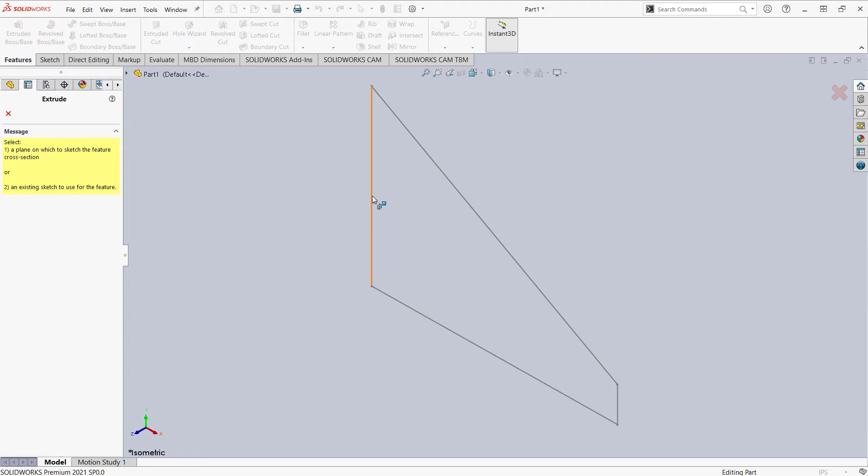Let's turn this sketch into 3D, heading to our Features tab and selecting Extruded Boss Base. So we are now prompted to select a plane or an existing sketch. I'm going to select this sketch, left click on this vertical line. Let me pull this arrow to the left, left click and hold.

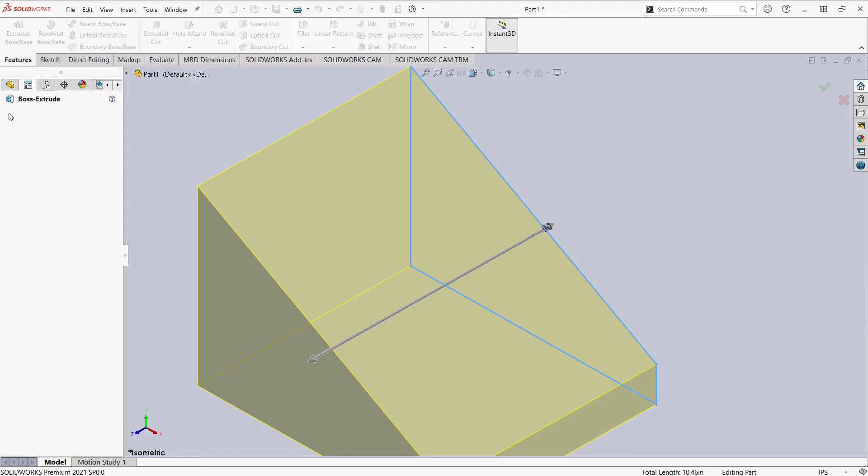Direction, blind, and our depth of extrusion to be 3. Selecting this green check mark. Let's create another sketch, this time on our top plane. Heading over to our Feature Manager, hovering over top plane, left click on this and select Sketch.

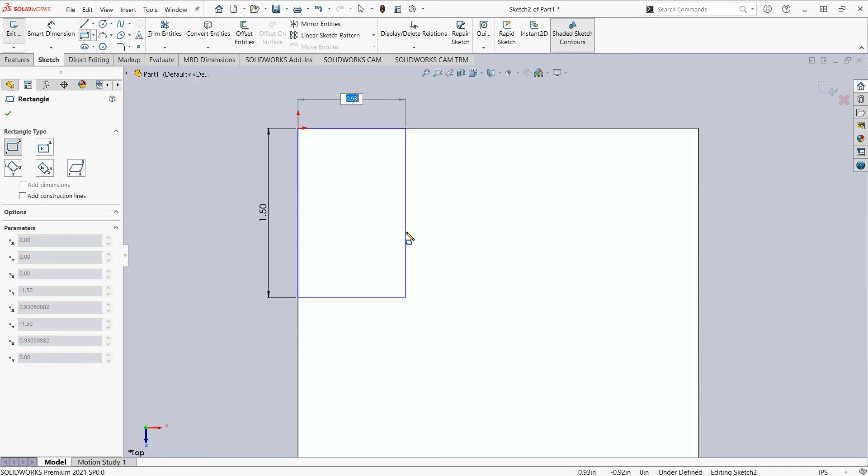Instead of grabbing our line command, I'm going to select our corner rectangle. Let's place its first point on this corner. Left click here. Notice the dimension field on the top is currently highlighted in blue. With that, I'm going to key in 1.5. Hitting enter. And let me pan down. And instead of keying in another value, I'm just simply going to left click and hit escape.

Let's grab our line command and this time create a triangle, heading up and selecting line. Let's place our first point at this intersection. So notice as I hover over this line, that yellow square on this line is the midpoint. Let's stray away from that. I'm going to simply left click on this intersection, move down.

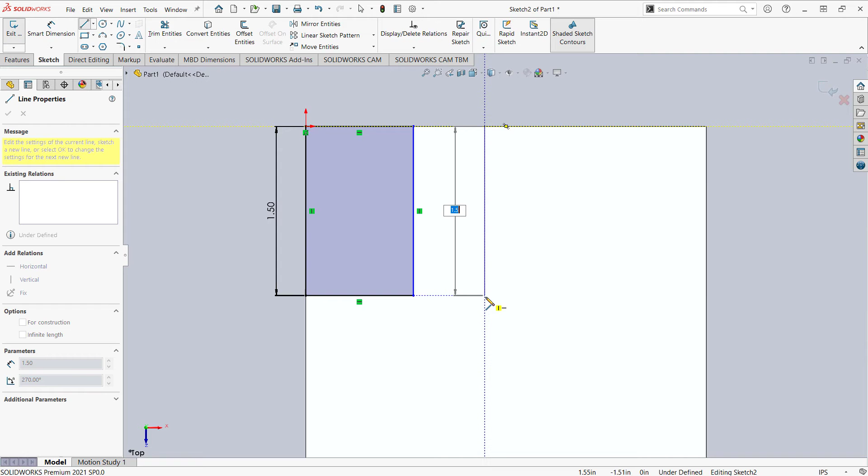Notice the blue dashed line indicating the snap tracks. I'm going to left click here, move to this point or corner, left click and double left click. Hitting escape to disable the line command.

Moving forward, this point, I'm going to left click and hold, needs to be aligned horizontally with this point. So with that, I'm going to select these 2 points, holding control and selecting this point. Let's head over to our properties under add relations and select horizontal.

Let's now define the distance between these 2 lines. Heading to our sketch tab, selecting smart dimension, selecting these 2 lines. The distance between them to be 1, hitting enter. Let's define the angle between these 2 lines to be 45, hitting enter.

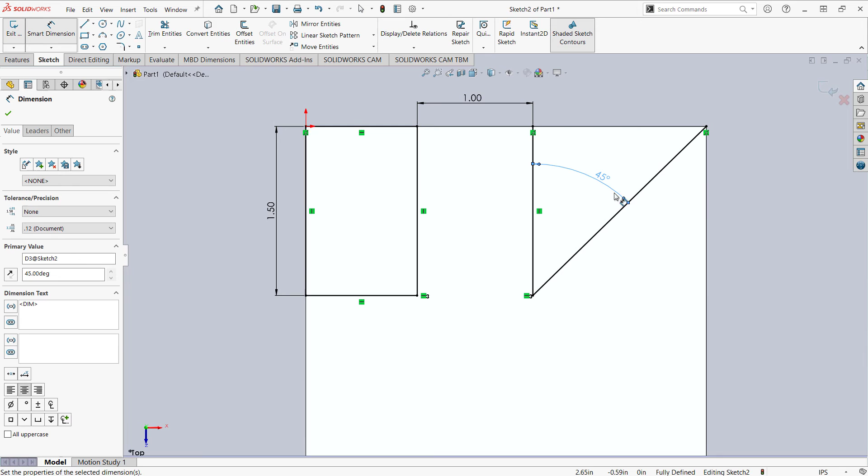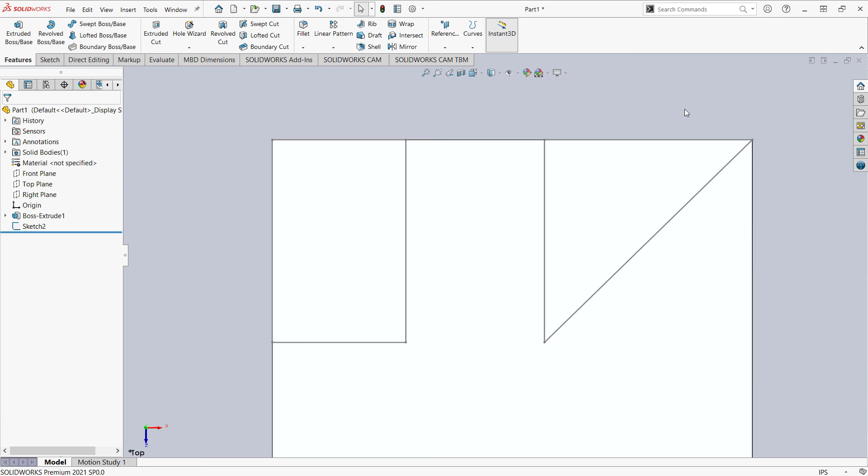In addition, let's turn this triangle into a sketch contour. Heading up, selecting line. Let's create a line from this point going to this point. Hitting escape. Let's now exit sketch. Hitting Control 7 for isometric view. Let's head up to our Features tab and selecting Extruded Boss Base.

Prompted to select a plane or an existing sketch. Let me select this sketch and this sketch contour. But first, I'm going to head over to our Boss Extrude panel, activating selected contours. Notice it turns into blue. I'm now going to select this triangle.

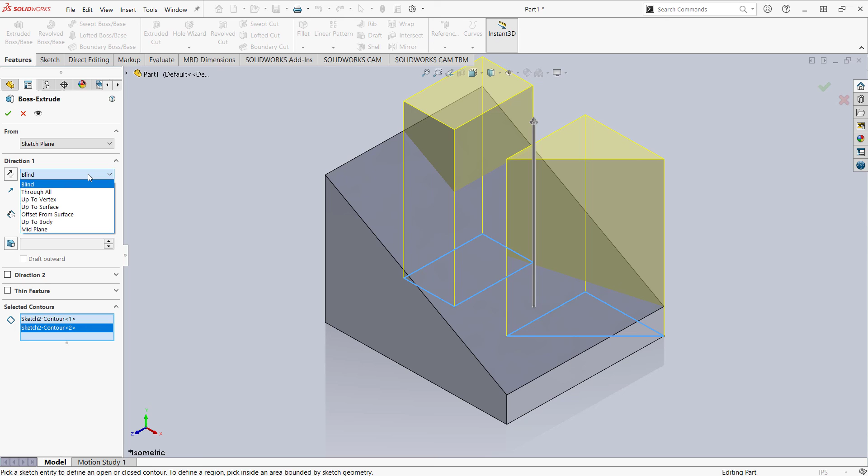And for its direction, I'm going to change this from blind to up to a vertex, and that vertex will be this point. Making sure merge result is enabled, and selecting the green check mark. As quick as that, we have created the part stopper.